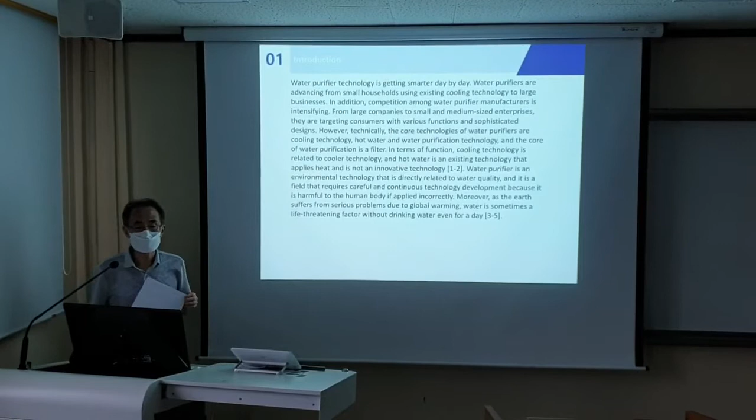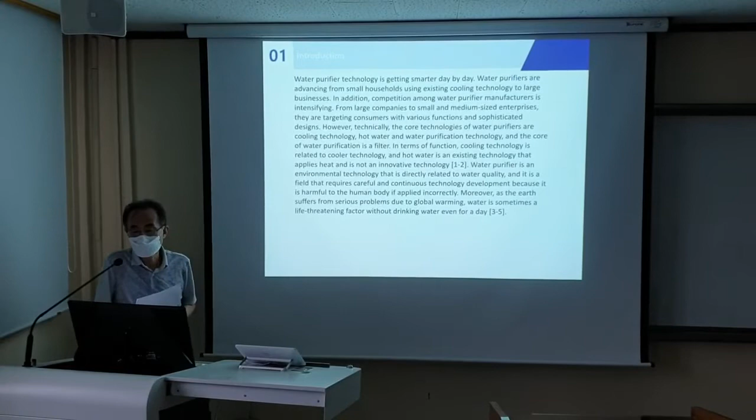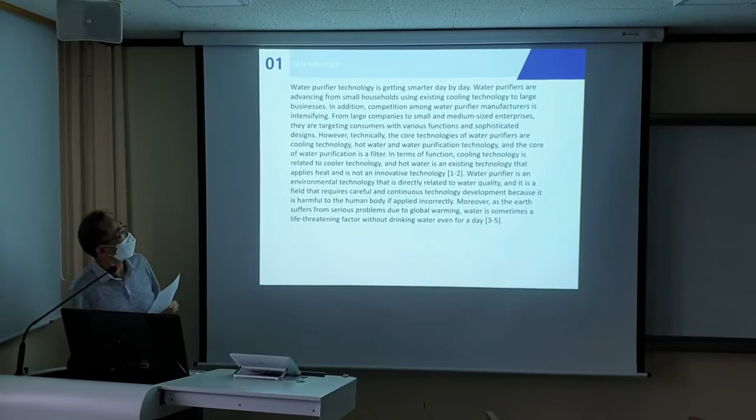Water purifier technology is getting smarter day by day, advancing from small households using existing cooling technology to large businesses. In addition, competition among water purifier manufacturers is intensifying, from large companies to small and medium-sized enterprises, targeting consumers with various functions and sophisticated design nowadays.

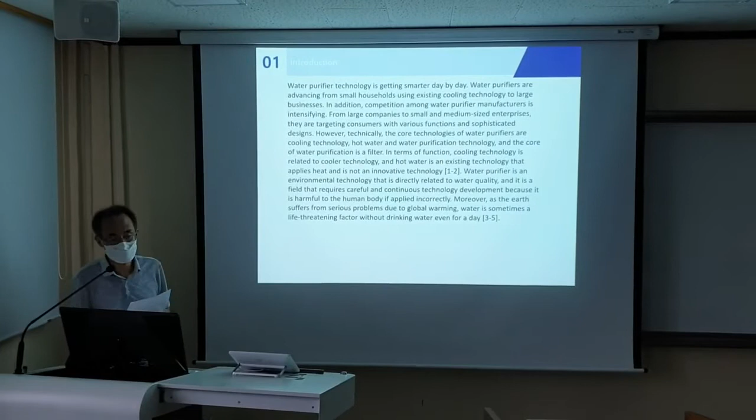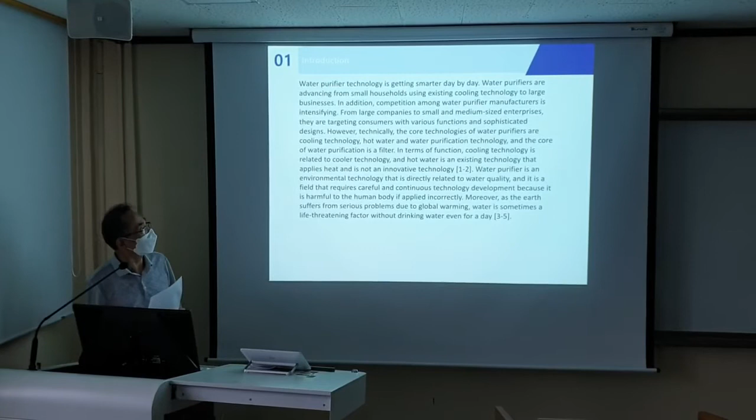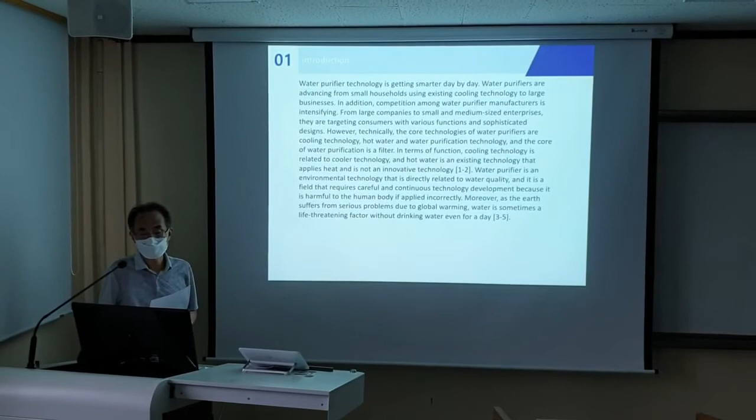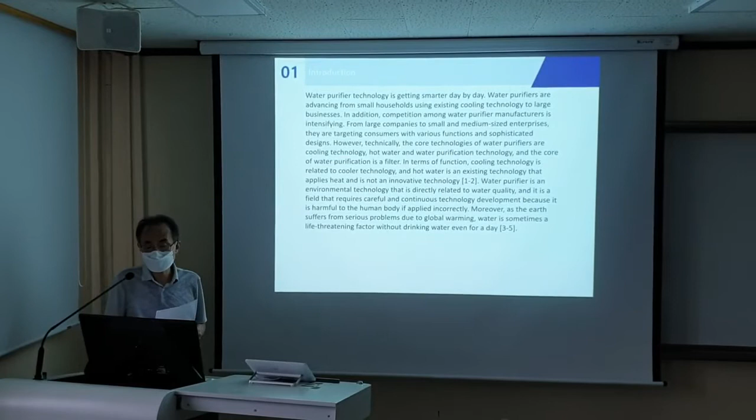However, technically, the core technologies of water purifiers are cooling technology, and secondly, hot water and water purification technology. The core of all water purification is the filter. In terms of function, cooling technology is related to cooler technology, and hot water is an established technology that applies heat, not an innovative technology.

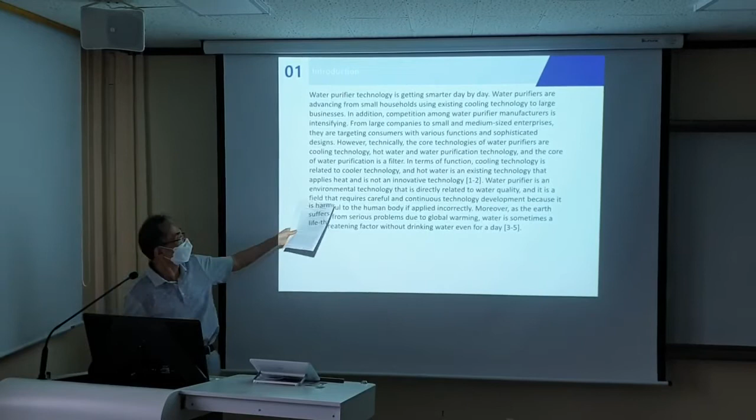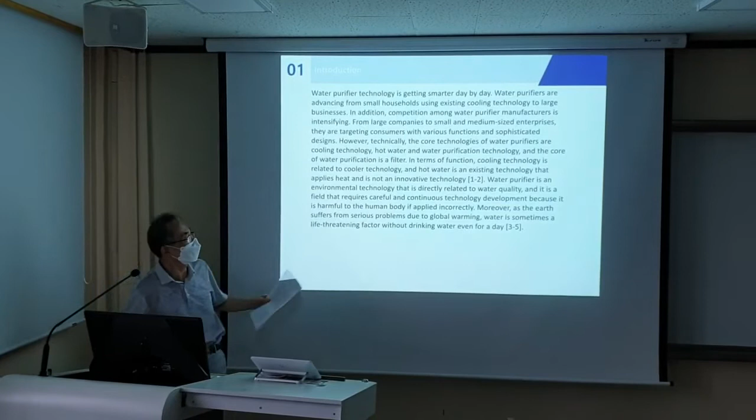Water purifier is an environmental technology that is directly related to water quality, and it is a field that requires careful and continuous technology development because it is harmful to the human body if applied incorrectly.

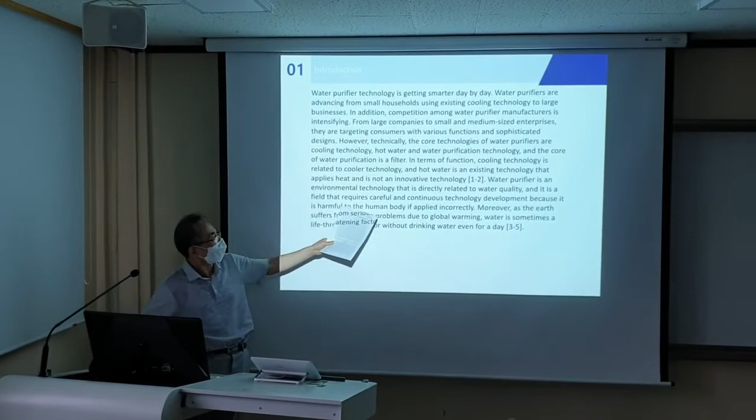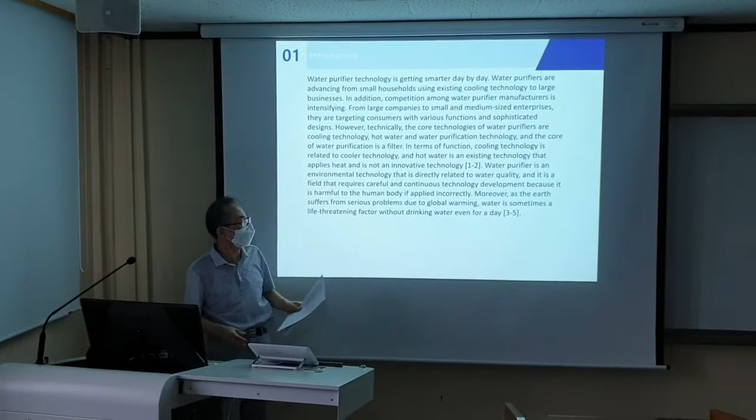Moreover, as the Earth suffers from serious problems due to global warming, water is sometimes a life-threatening factor without drinking water even for a day. Fortunately, Korea has good water quality compared to other countries, but Vietnam, China, the Middle East, Africa, Indonesia, and other places on earth have poor water quality or lack of water.

According to TechSci Research, a global market research firm, in 2018, the Vietnamese water purifier market was valued in 2017 at approximately $106 million. In addition, the Vietnamese water purifier market has grown at a compound annual growth rate of more than 12% since 2017, and is expected to exceed $221 million by 2023.

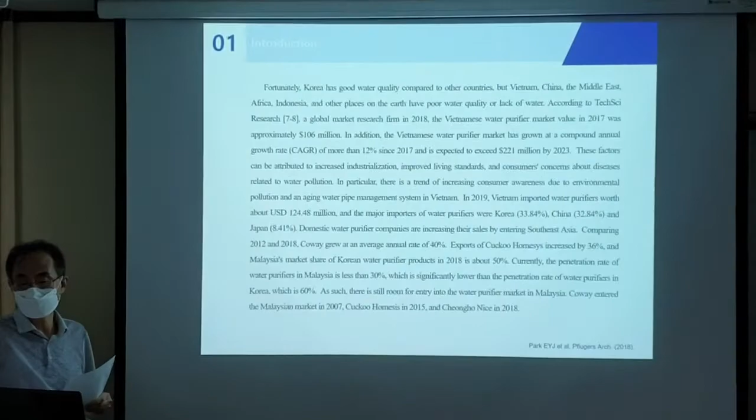As for Cuckoo Homesys, they increased by 36%, and Malaysia's market share of Korean water purifier products in 2018 is about 50%.

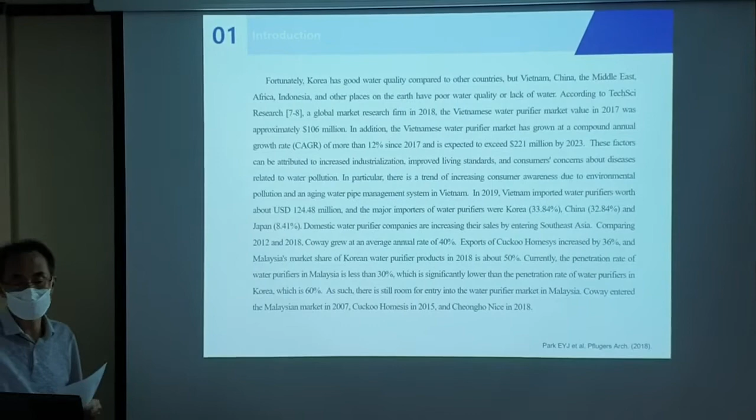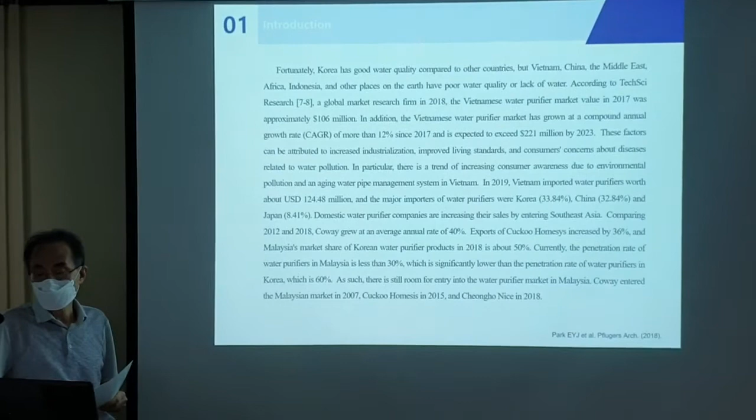Currently, the penetration rate of water purifiers in Malaysia is less than 30%. This is significantly lower than the penetration rate of water purifiers in Korea, which is about 60%. As such, there is some room for entry into the water purifier market in Malaysia.

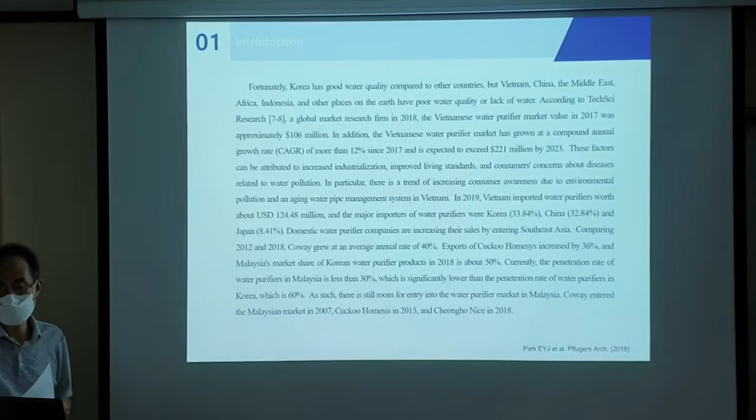Coway entered the Malaysia market in 2007. Cuckoo Homesys entered in 2015, and Cheongho Nice entered in 2018.

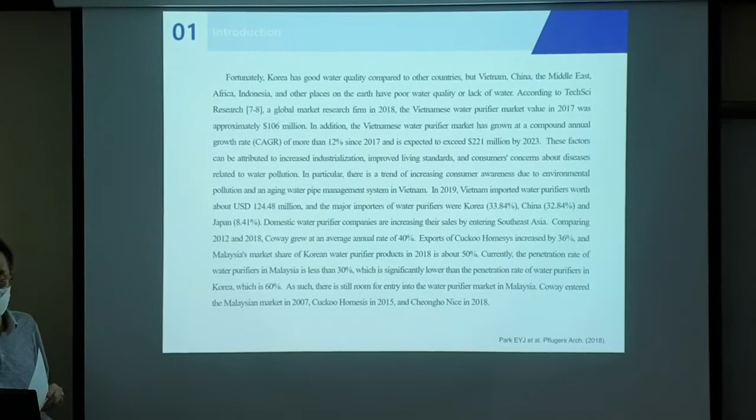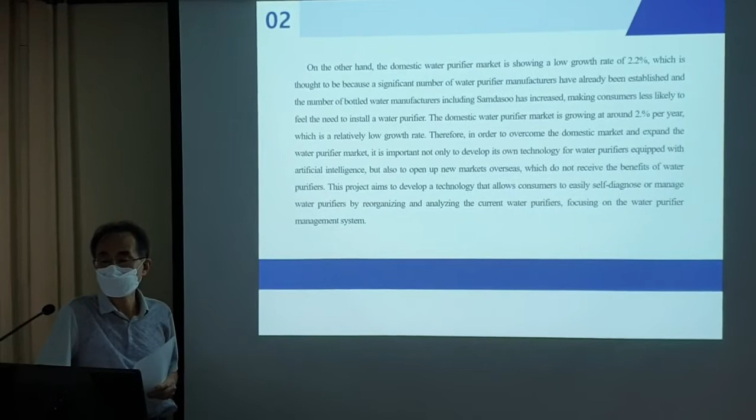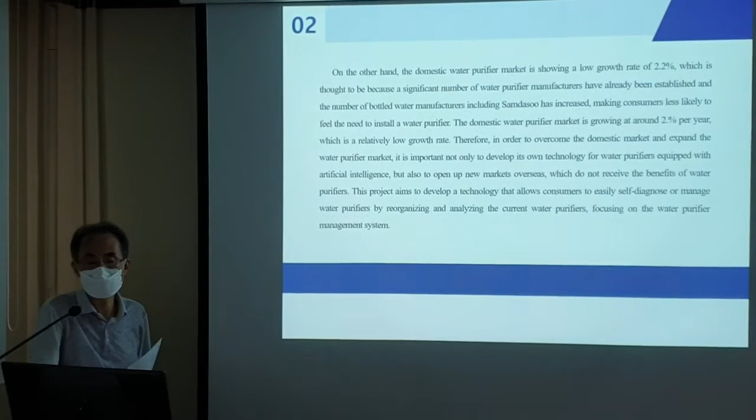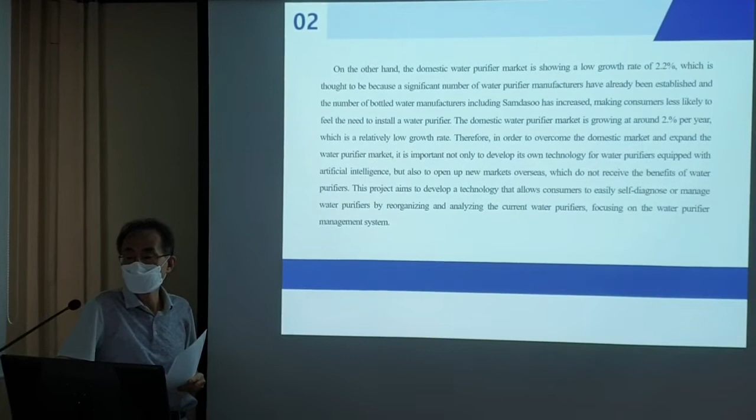On the other hand, the domestic water purifier market is showing a low growth rate of 2.2%, which is thought to be because a significant number of water purifier manufacturers have already been established, and the number of bottled water manufacturers, including Samdasoo, has increased, so consumers are less likely to feel the need to install a water purifier.

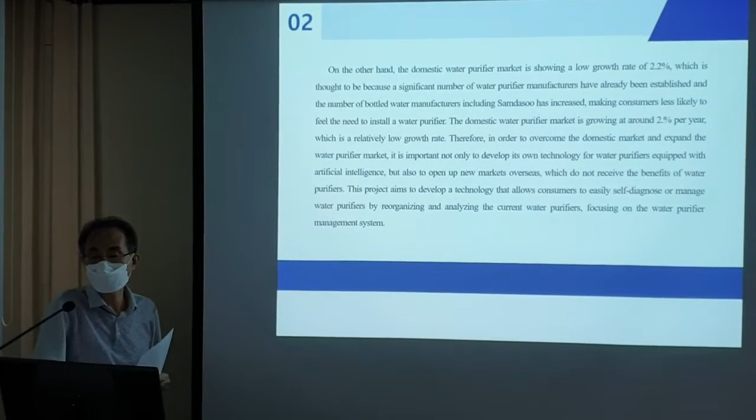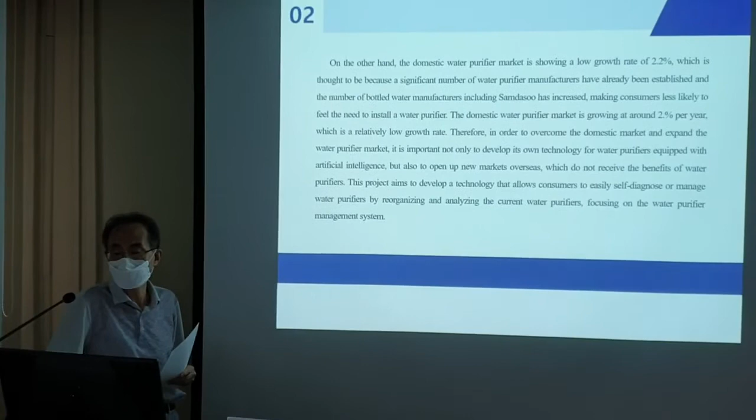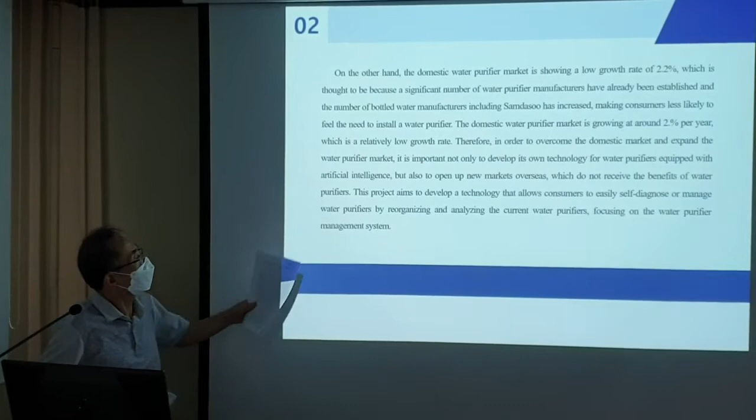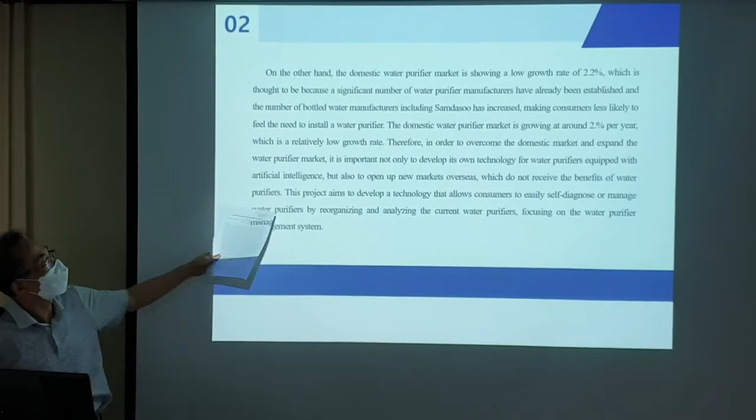The domestic water purifier market is growing at about 2% per year, which is a relatively low growth rate. Therefore, in order to overcome the domestic market and extend the water purifier market, it is important not only to develop its own technology for water purifiers equipped with artificial intelligence, but also to open up new markets overseas that do not yet receive the benefit of water purifiers.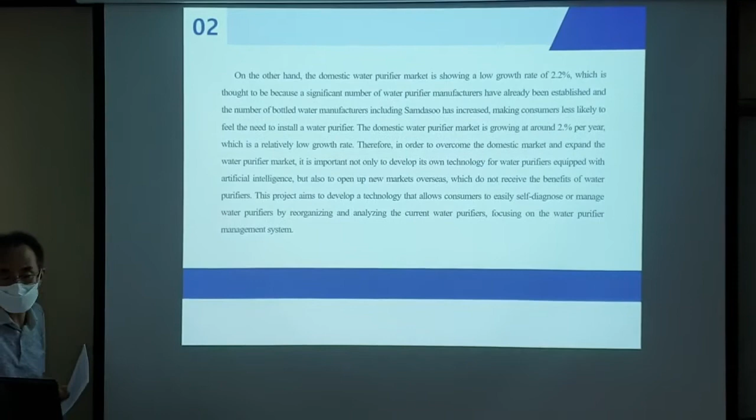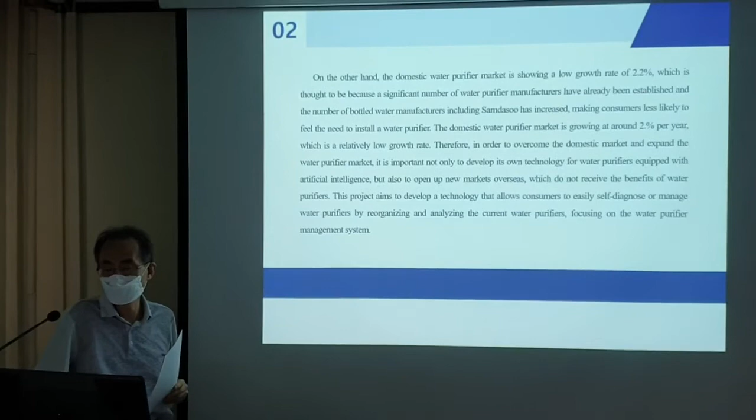This project aims to develop the technology that allows consumers to easily self-diagnose or manage their water purifier by recognizing and analyzing the current water purifier, focused on a water purifier management system.

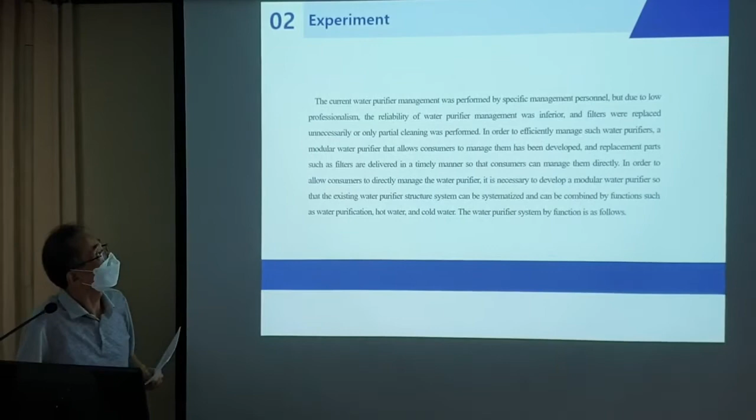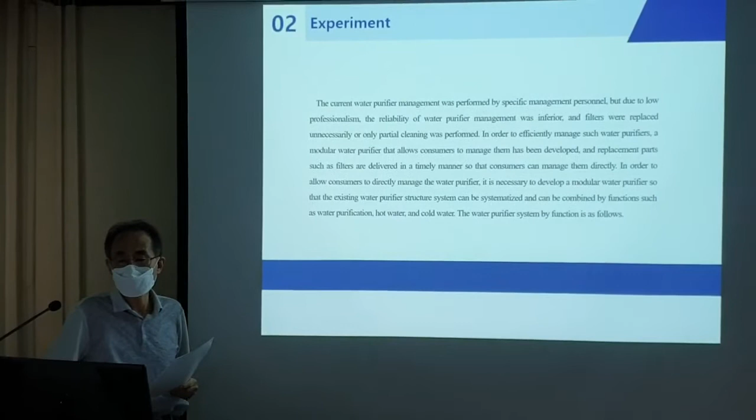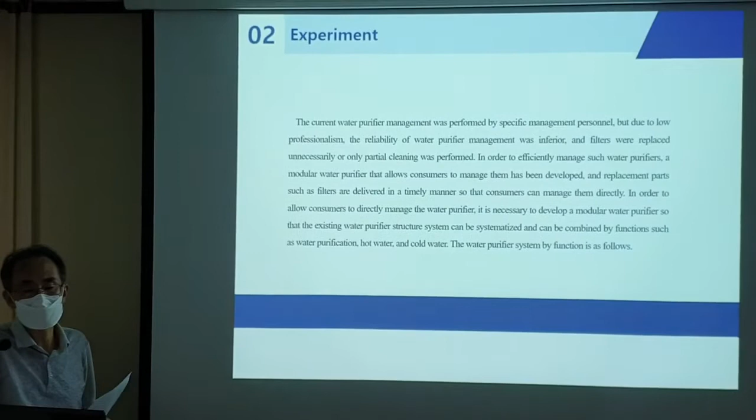Let's go to the experiment. For the experiment, the current water purifier management was performed by specific management personnel, but due to low professionalism, reliability of water purifier management was inferior, and the filter was replaced unnecessarily, or only partial cleaning was performed.

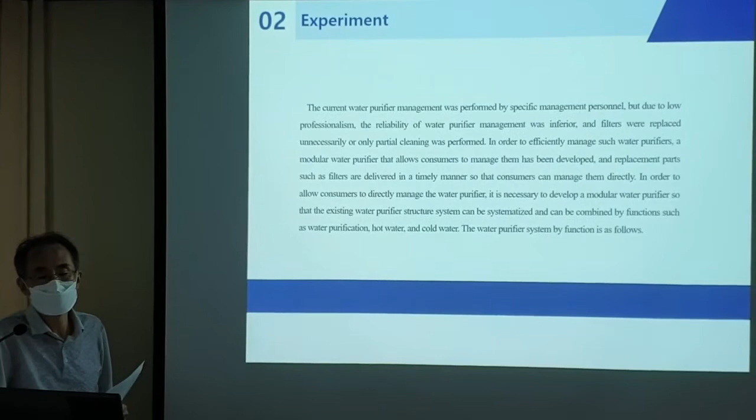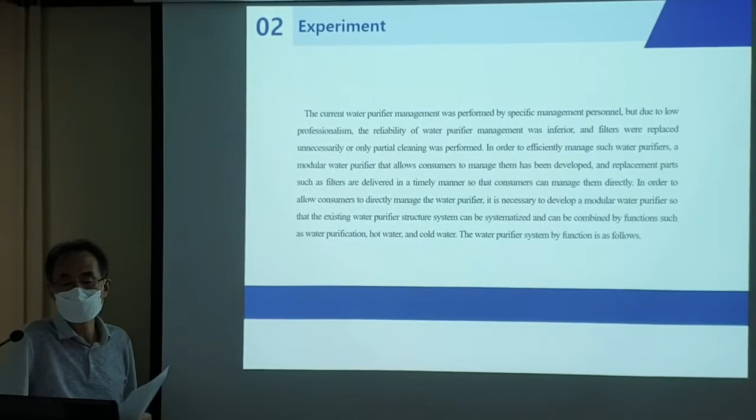In order to efficiently manage such water purifiers, a modular water purifier that allows consumers to manage it themselves has been developed. The replacement parts such as filters are delivered in a timely manner so that the consumer can manage them directly.

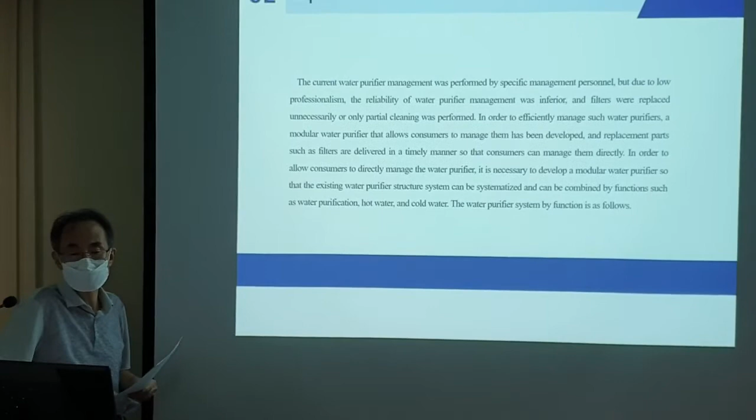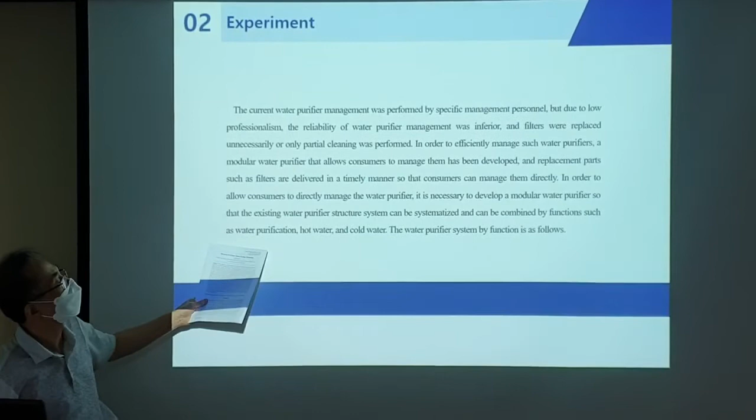In order to allow the consumer to directly manage the water purifier, it is necessary to develop the modular water purifier so that the existing water purifier structure system can be systematized and combined by functions such as water purification, hot water, and cold water. This water purifier system by function is as follows.

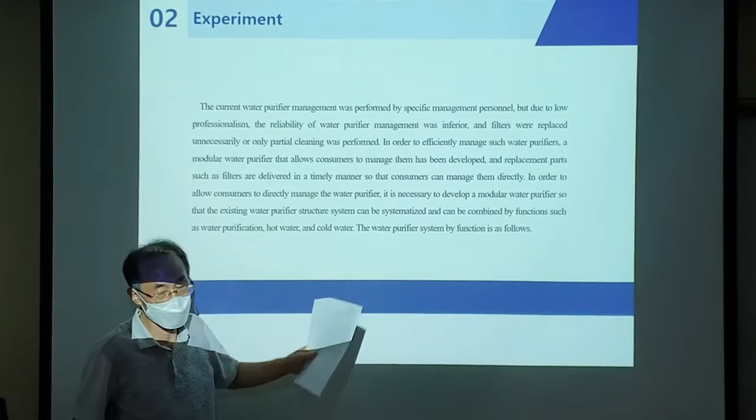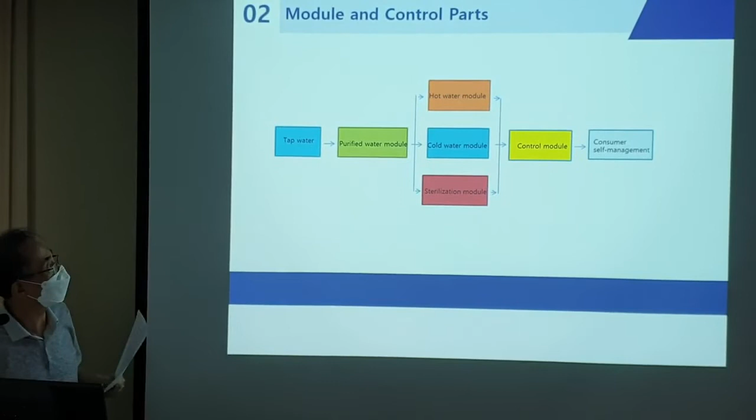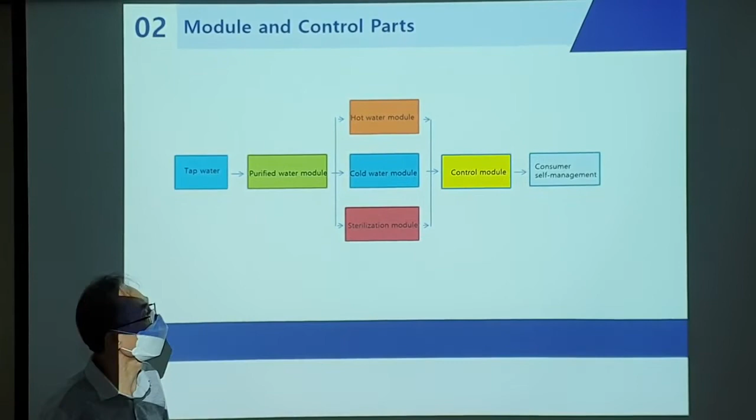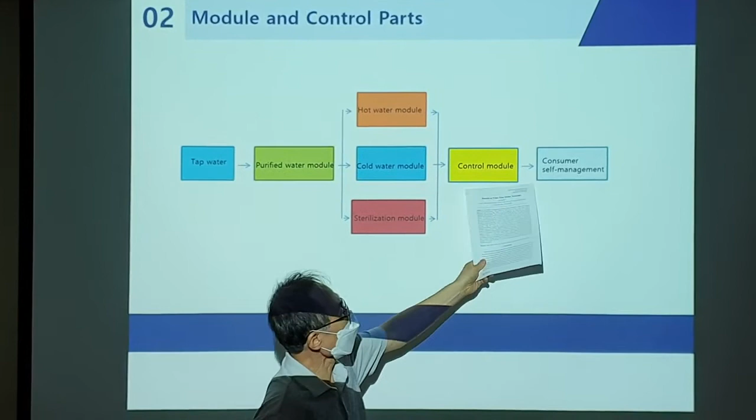Let's look at an overall view of the system. Tap water goes into the purified water module, and there are three separate modules: a hot water module, a cold water module, and a sterilization module, connected by a control module. Finally, the consumer can manage self-management.

This figure shows the result of how we systemized the purifier.

This is a water purification module test. Water pressure of 1 kilogram-force per square centimeter of tap water was supplied to the water purifier, passed through the filter, and then the time required to drain 150 cubic centimeters, and 1,000 cubic centimeters of purified water was measured.

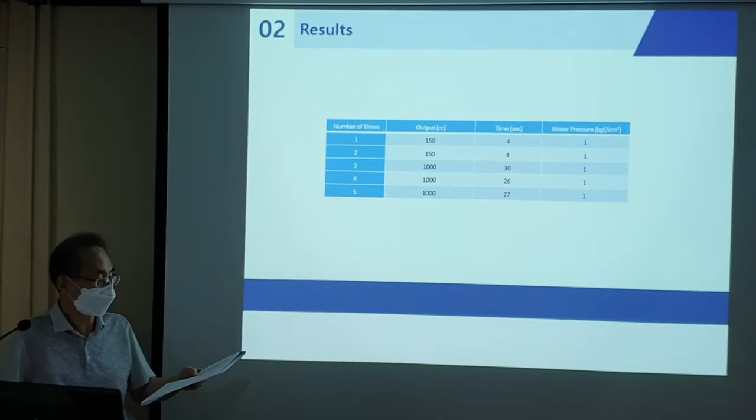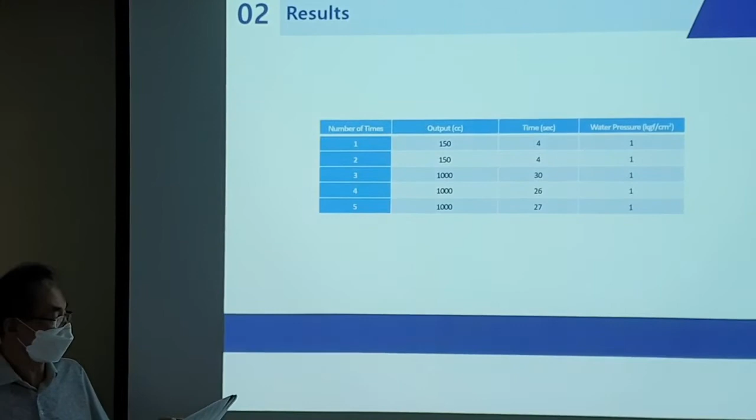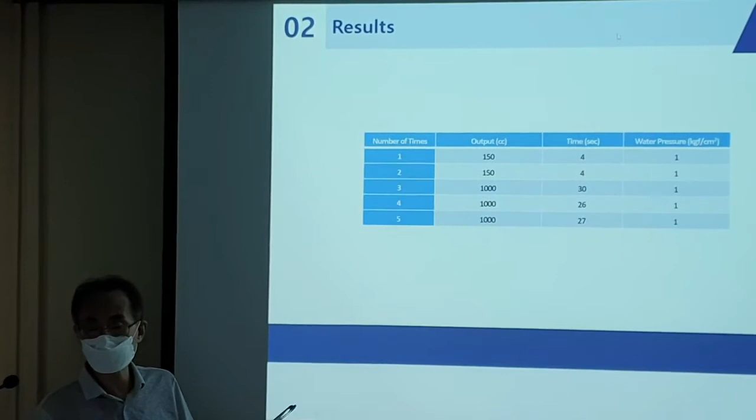It took 4 seconds to dispense purified water, and it took 30, 26, and 27 seconds for each cycle to dispense 1,000 cubic centimeters of purified water. Considering the test error, the average discharge flow rate is estimated to be about 38 cubic centimeters per second. This summarizes what I mentioned.

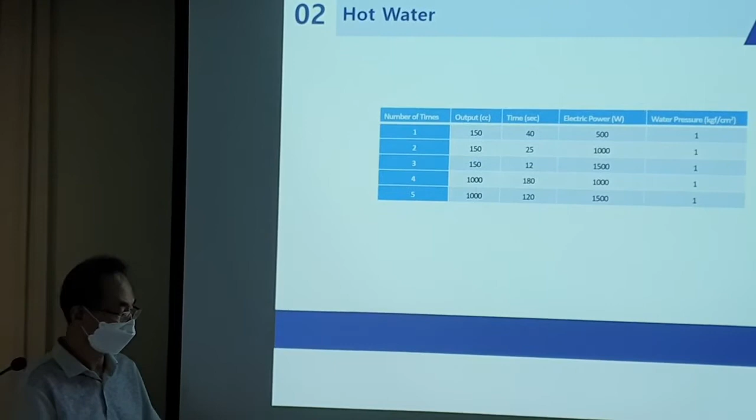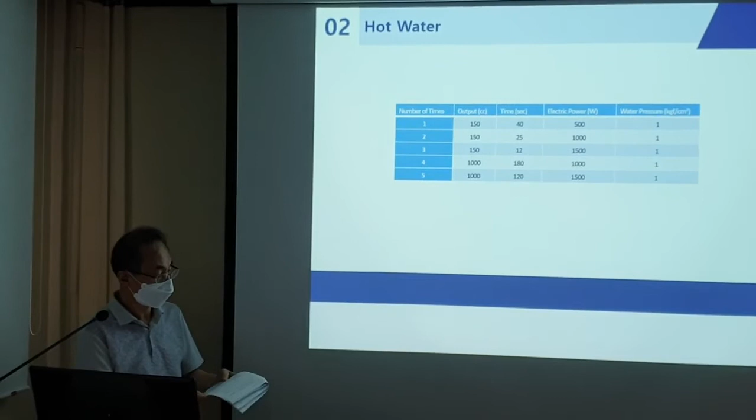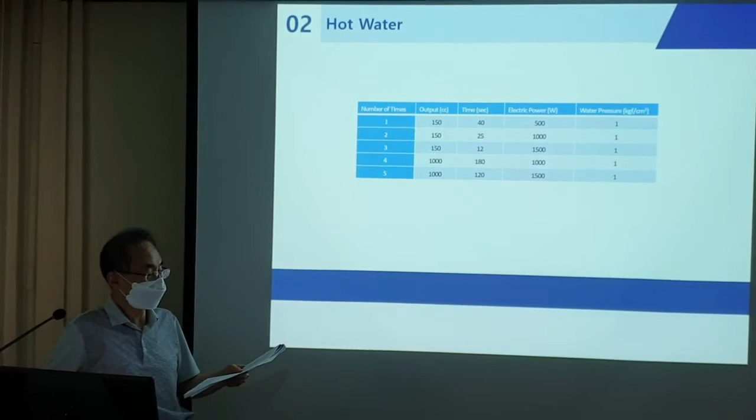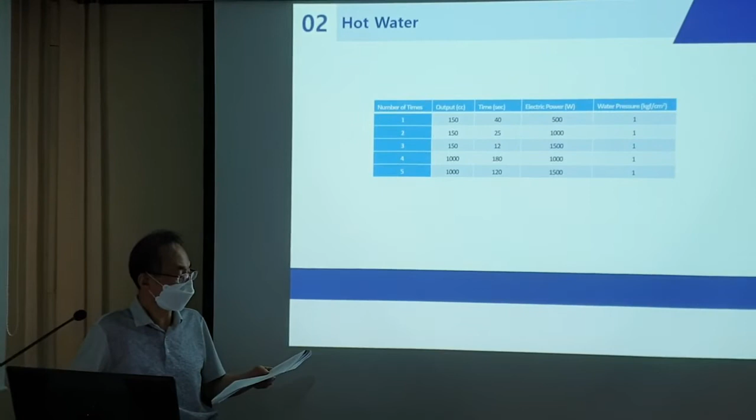So the time was shortened even if the amount of hot water was the same. If the amount of hot water increased, the energy consumption increased, so the time required became larger. This summarizes what I just mentioned.

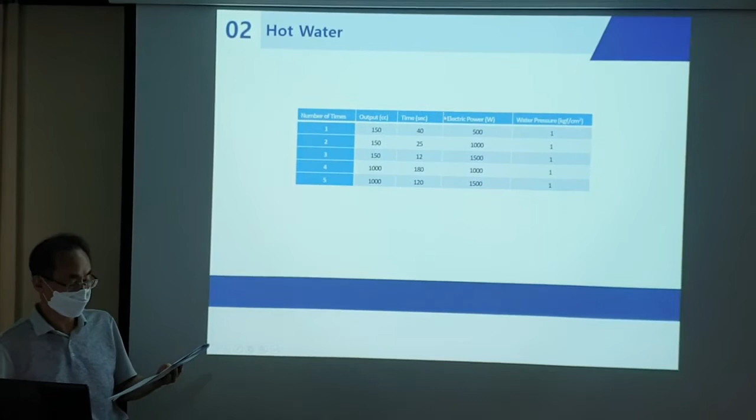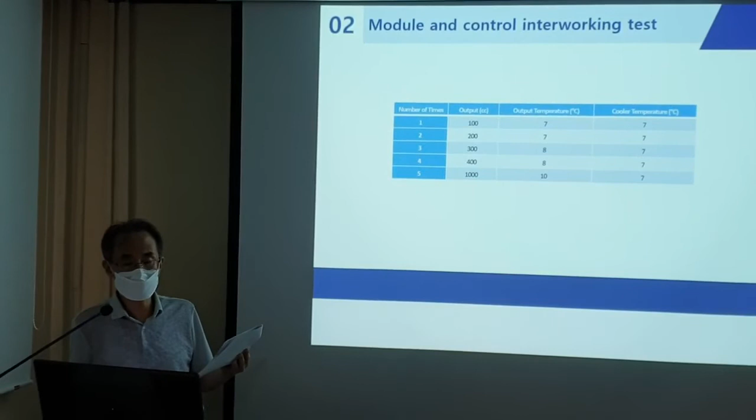Finally, we conducted another experiment - a so-called module and control interworking test.

For the cooler module interworking test, the set temperature of cold water was set to 7 degrees, and the operating temperature of the cooler system was set at 9 degrees. The water temperature was set to 12 degrees, and the water output per minute was set at 400 cubic centimeters.

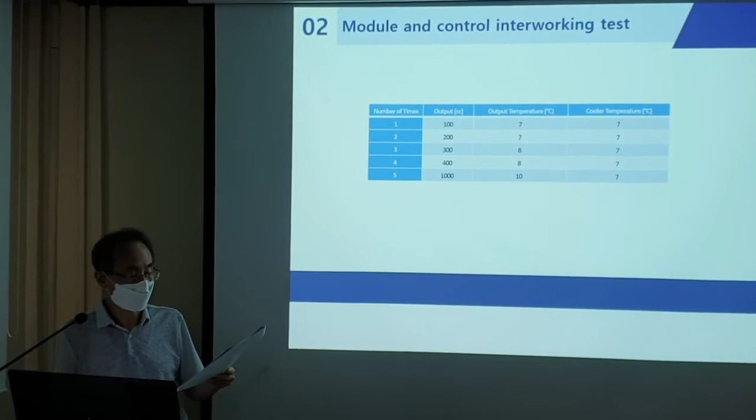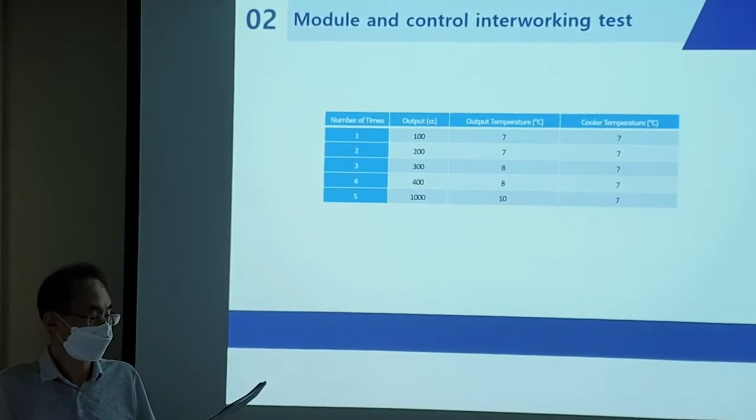This table shows the water output temperature change according to the water outlet volume, while the cooler temperature is fixed at 7 degrees. Water output temperature was constant at 7 degrees until a water output of 200 cubic centimeters, but the temperature rose slightly to 8 degrees until the water output of 400 cubic centimeters.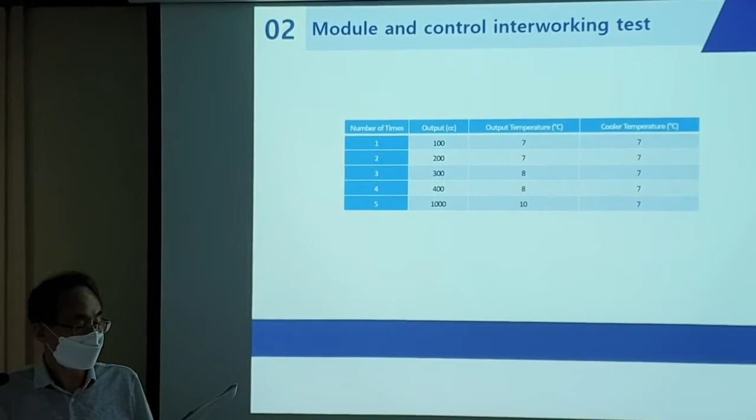In addition, it was confirmed that when the amount of water output was increased to 1,000 cubic centimeters, the temperature of the water output started to increase.

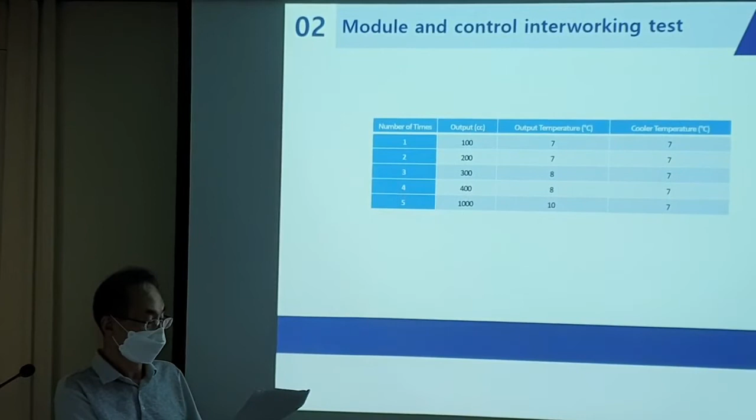Also, in the case of continuous water discharge, for example when 2,000 cubic centimeters of water was discharged, the cooler operating time increased rapidly to about 15 minutes. And in the case of 3,000 cubic centimeters, the cooler operation time was 150 minutes.

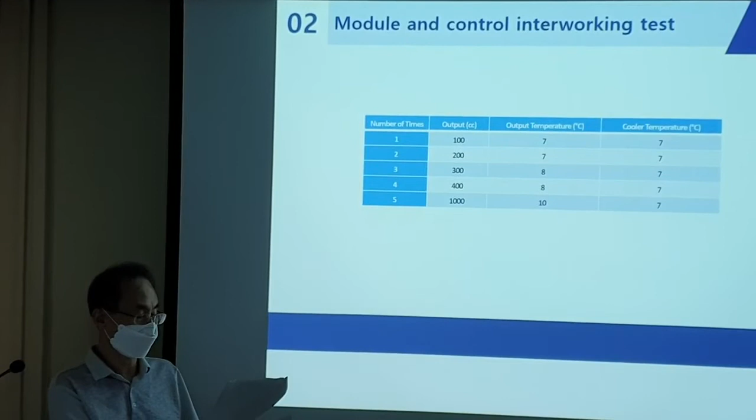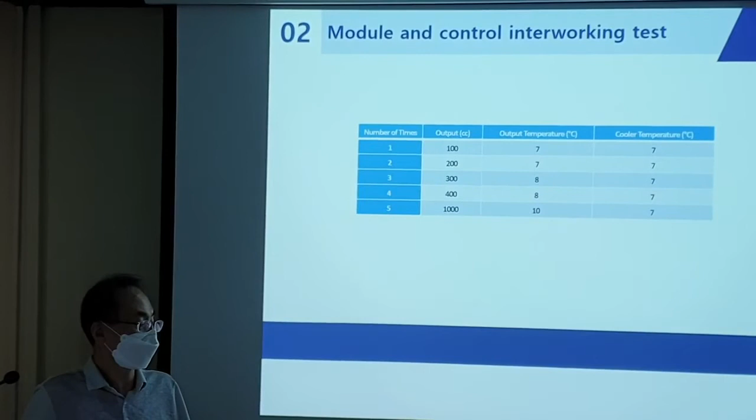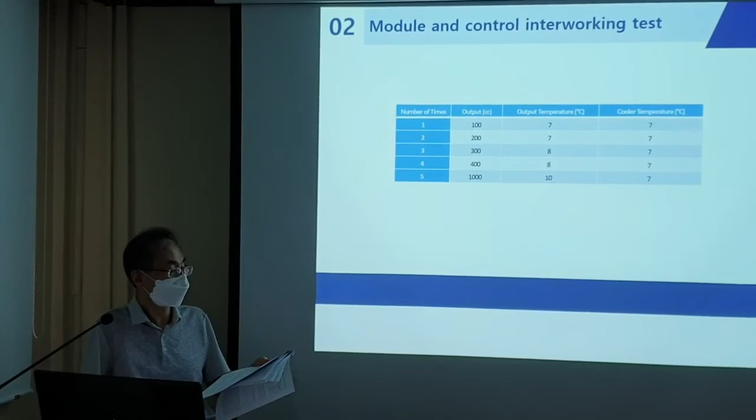In addition, the temperature when the cooler stopped inside the cooler system, and the change in temperature inside the cooling system after the cooler stopped, were measured. As a result, even though the cooler was stopped, it was confirmed that the internal temperature of the cooler system dropped by 4 to 5 degrees. This showed the results I just mentioned.

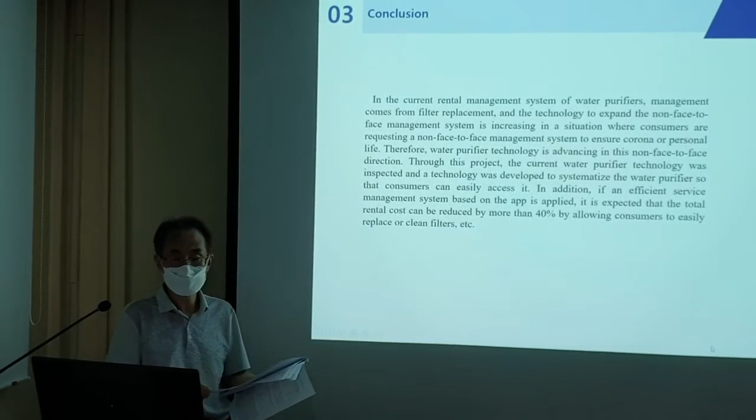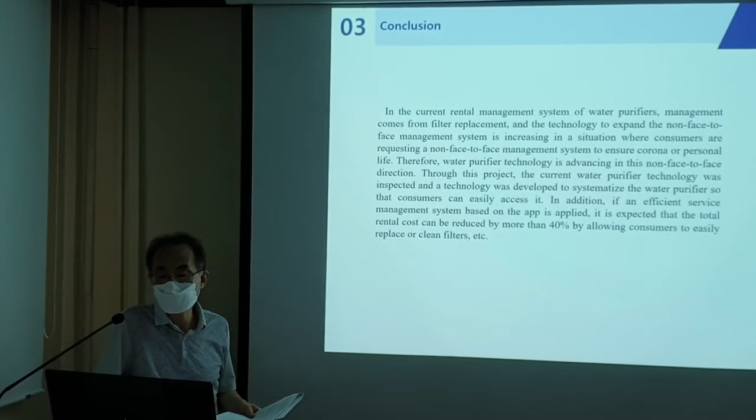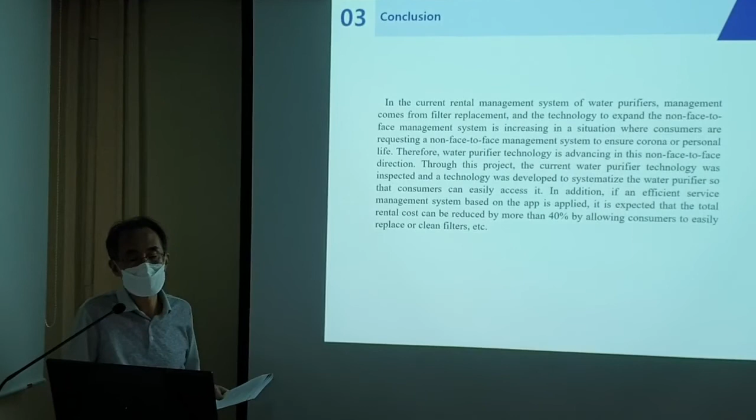Let's draw a conclusion from this. In the current rental management system for water purifiers, management comes from filter replacement and the technology to expand non-face-to-face management, the system is increasing in a situation where consumers are requesting non-face-to-face management to ensure corona or personal life. Therefore, water purifier technology is advancing in this non-face-to-face direction.

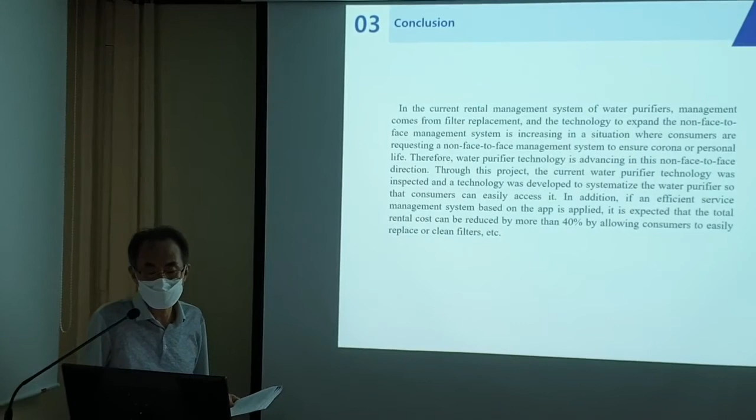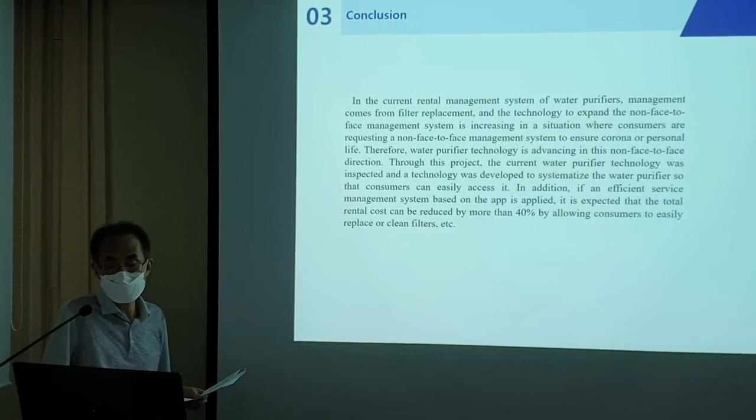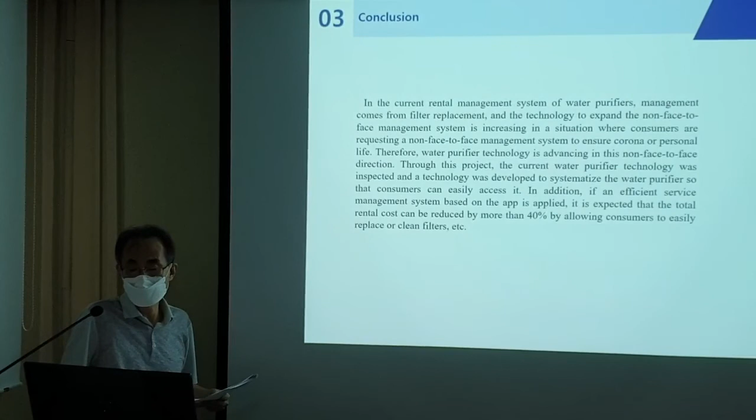Through this project, the current water purifier technology was inspected and the technology was prepared to systemize the water purifier so that consumers can easily access it. In addition, if an efficient service management system based on an app is applied, it is expected that total rental costs can be reduced by more than 40% by allowing consumers to easily replace or self-clean filters, etc.